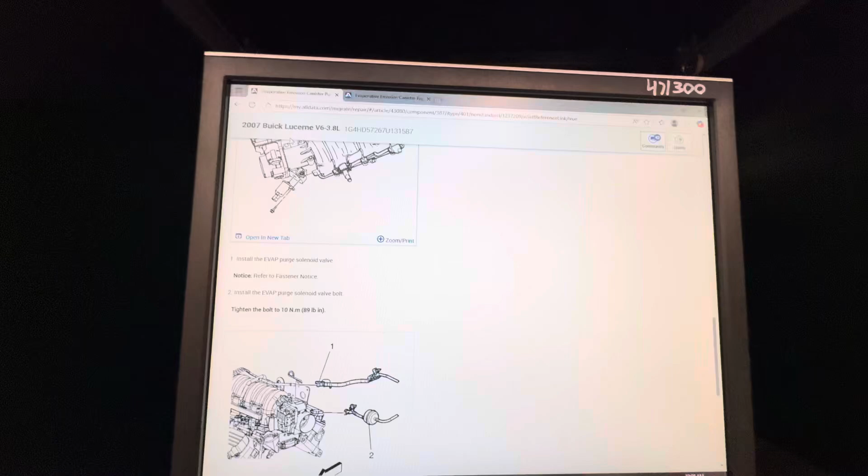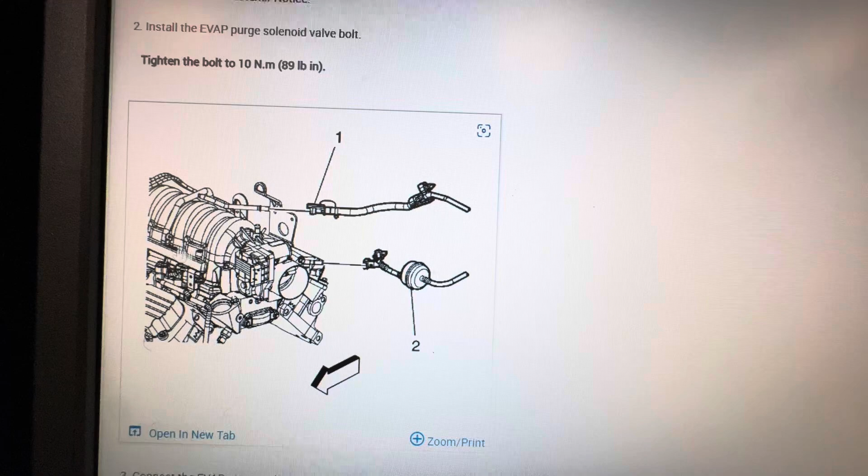This week for our Evap lab, we're going to be taking a look at a 2007 Buick Lucerne. And here on All Data, it is showing our purge solenoid up by the intake manifold and how that is going to be going to the canister under the car. So you can see with our hoses coming in here.

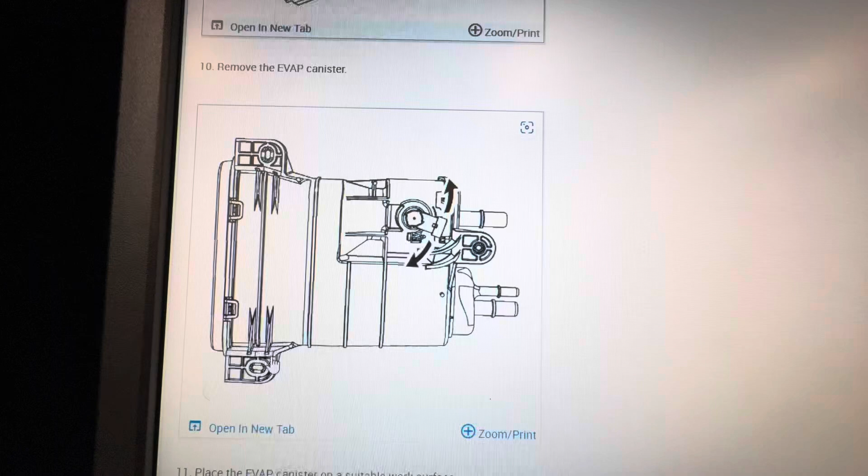This is a better view, but here's our pressure sensor and more connections in the back to our other solenoid and our gas tank. Here is that other solenoid I was talking about, and unlike some other cars with it being remotely mounted, this one is mounted on top of the canister and is very close. After taking a look on All Data, I'm going to be showing you it here on the car.

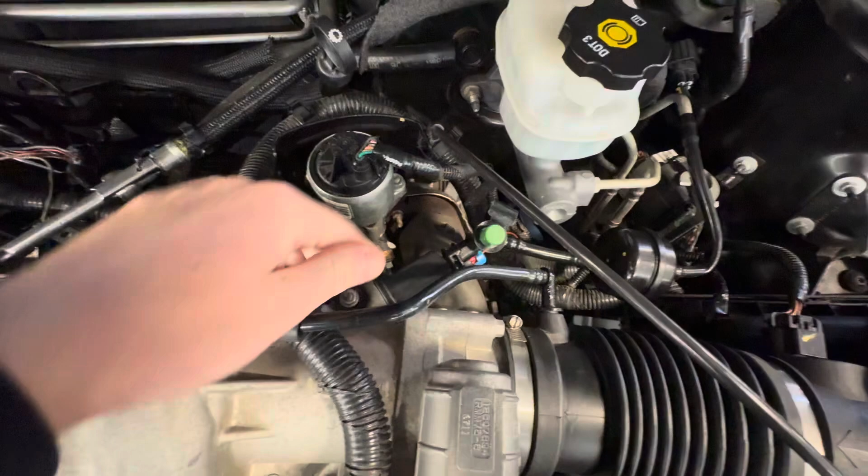So here's our purge solenoid. You can see those two wires down there, and here is our service port used to smoke test the Evap system. And then now we're going to take and follow this line all the way down to the underside of the car and show you everything else.

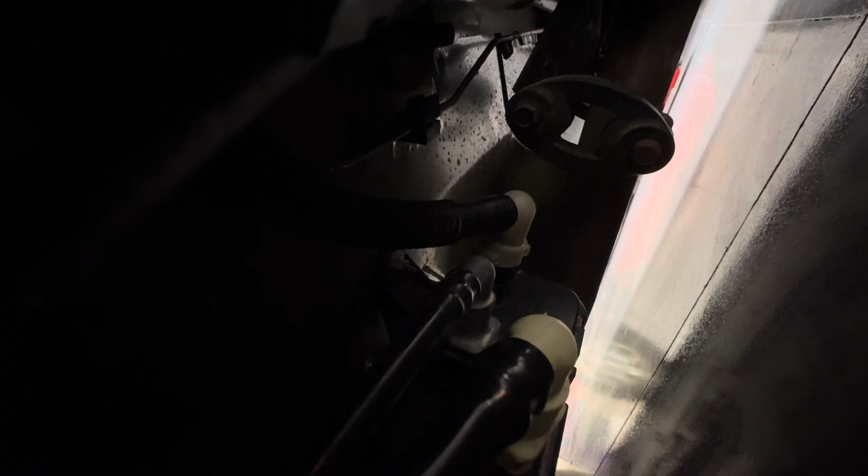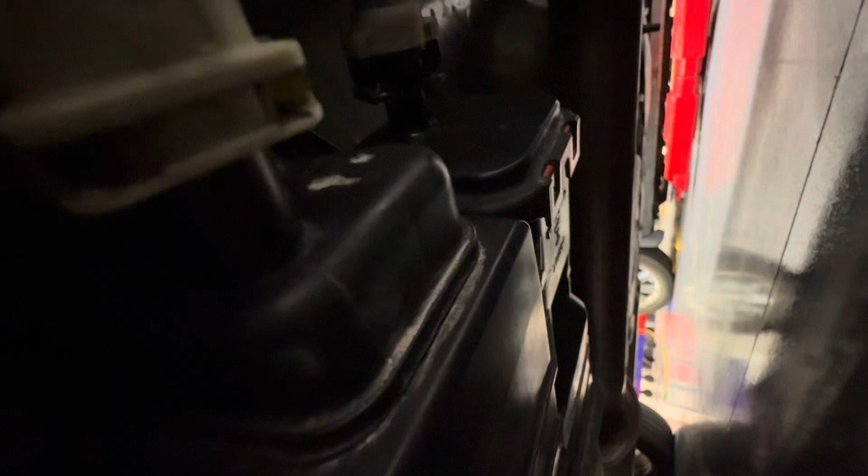So now that we are under the car here, you can see these three hoses coming in. That middle one is actually connected to that purge solenoid that we just came from at the front of the car. This far one is connected to our gas tank and to our charcoal canister here through that filter.

And then this one over here is to our fresh air, technically, and that second solenoid we have in the system, which is above the canister here. I don't think you can see that, but it is up there.

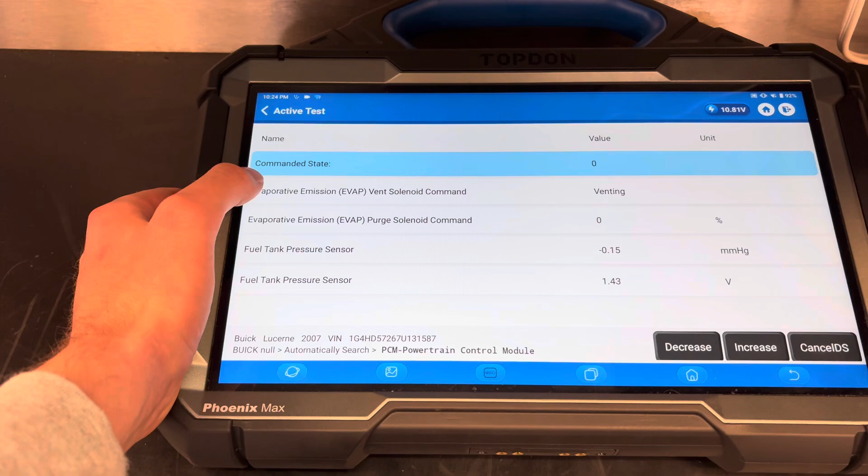Now in this Topdon scan tool, we're going to be looking at our live PID readings for our Evap system. Our evaporative emission vent solenoid is right now venting. It's open, and it will stay open until we have to run an actual Evap test and see how much pressure our system can hold, or vacuum our system can hold.

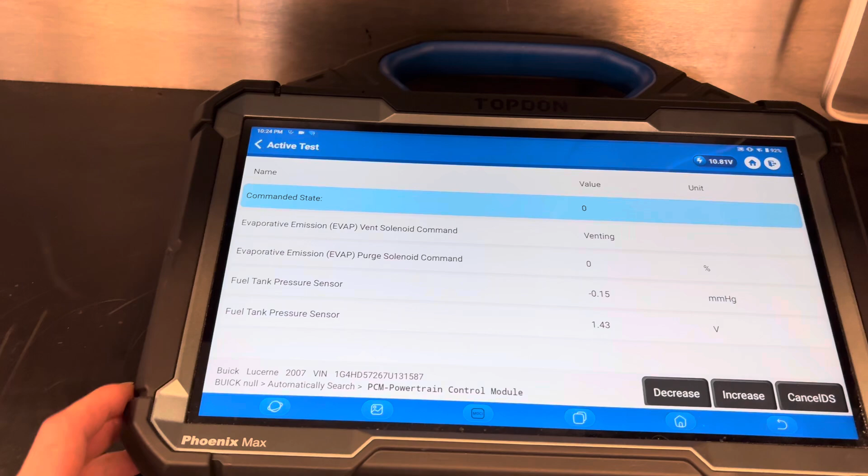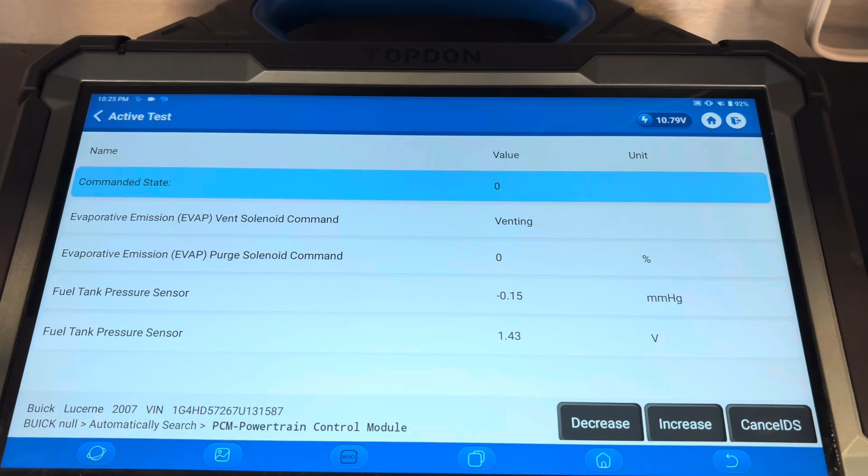Our purge solenoid command is at 0% right now. We can increase and decrease that as we go on. And our fuel tank pressure sensor is reading negative 0.15 mm of mercury. And that's equating to about 1.43 volts on the sensor reading.

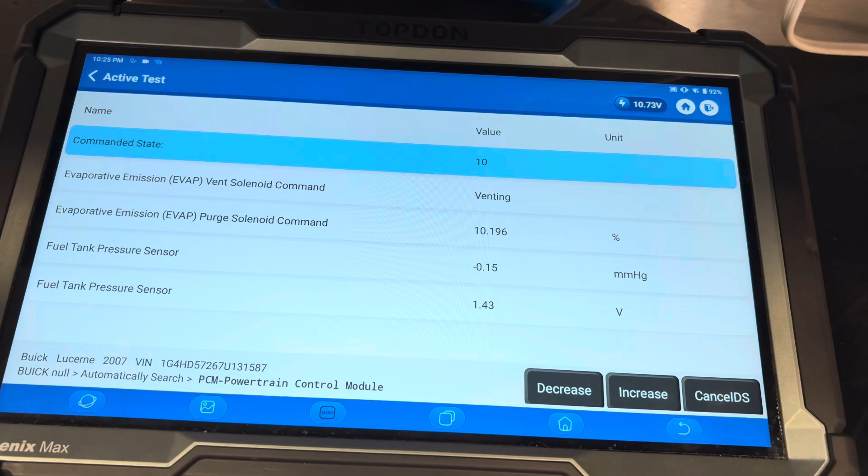If I increase this reading right here, I press increase, we can command it to 10%. And if we walk over to the vehicle, we can hear it actively pulse width modulating that solenoid, so we have 10% duty cycle.

So with our vehicle sitting here at idle, our 2007 Buick Lucerne, we're actually getting a good amount of usage from the Evap purge solenoid, and we're commanding it from about 14 to 20%.

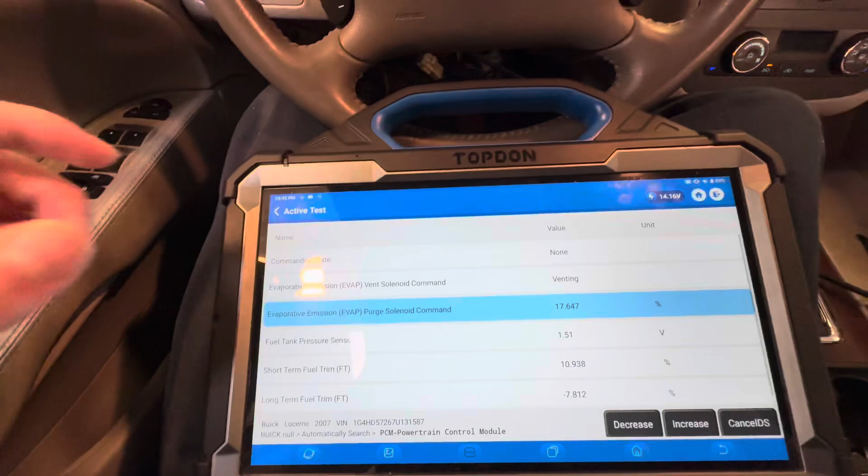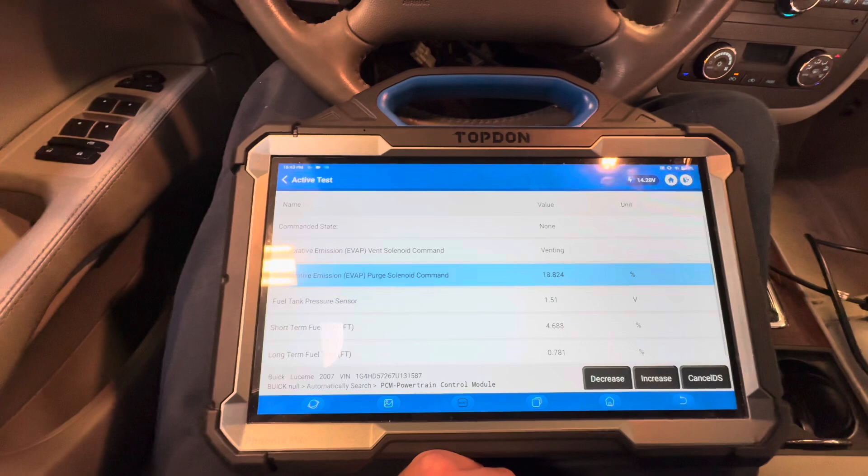And we were gonna look at our short-term and long-term fuel trims, how they changed as we increased the purge solenoid command. But here at idle, sitting in this vehicle, it is being commanded already. So we can look at our trims and we can impact them from that point. But I wanted to point out that we are getting a purge solenoid command at idle.

So let's decrease that reading. Let's make it 0. The vehicle, you can hear it running a little awkward now. And we're taking some fuel from our short-term fuel. We're cycling. Our long-term fuel trim seems to stay the same.

Let's increase that percentage again. Let's get 20%. Immediately our long-term fuel trim just shifted over. Our short-term fuel trim is still trying to figure out what it wants to do. It's at 4.688. So it's cycling, it's switching. But the second we increase that command percentage of our purge solenoid, our long-term fuel trim accounts for that and goes down.

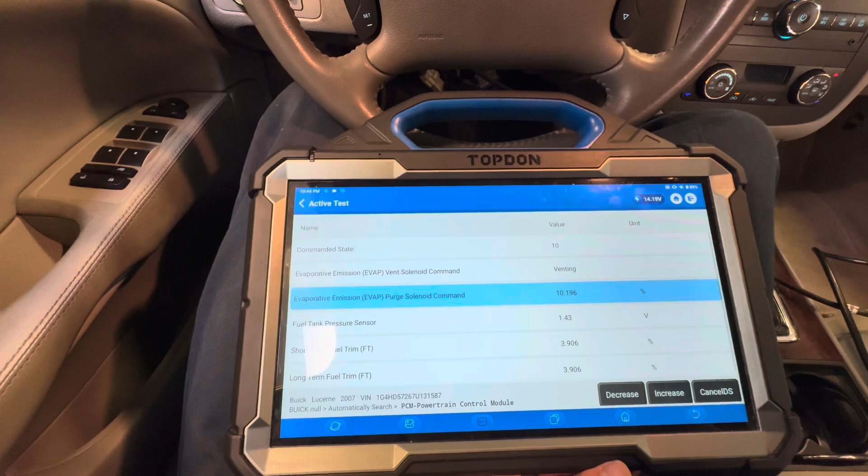So if I decrease it to 10, you see our short-term fuel trims are doing a lot more now. We're taking away a lot of fuel. Still taking away fuel. Now we're back to where, still taking a lot of fuel.

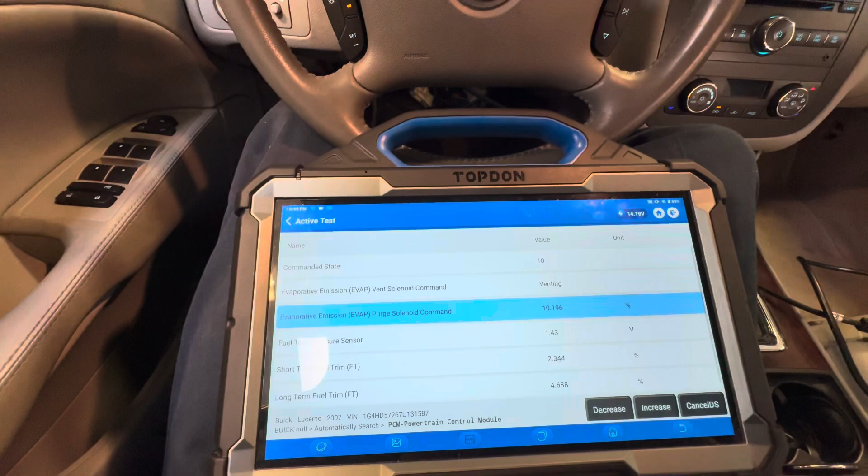Take it all the way down. Our long terms just switch back super high, or much higher than they were, and our short term starts to do less. So, food for thought. Just wanted to show what the vehicle is doing and how impacting the purge solenoid command altered our fuel trims.

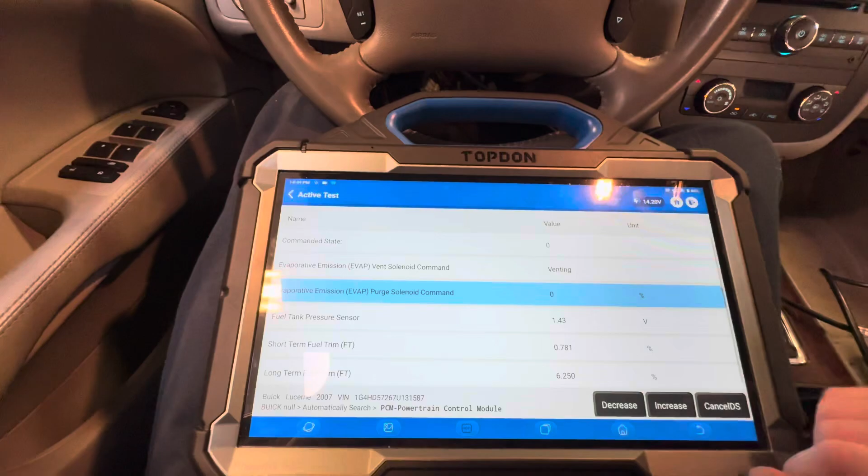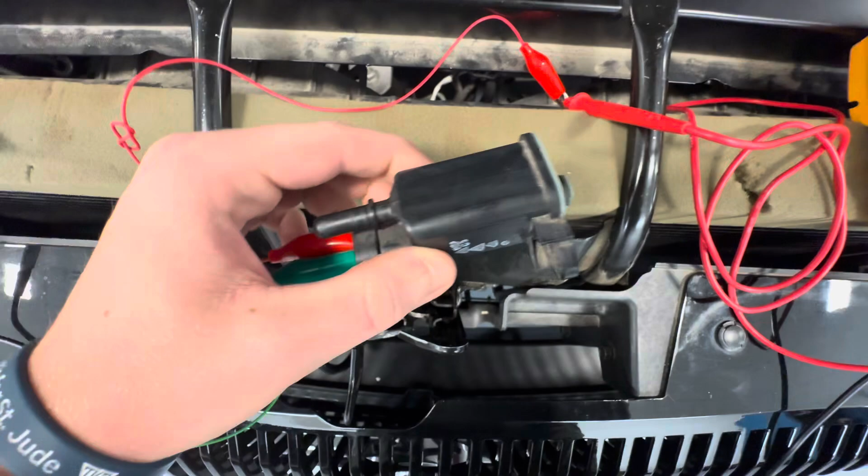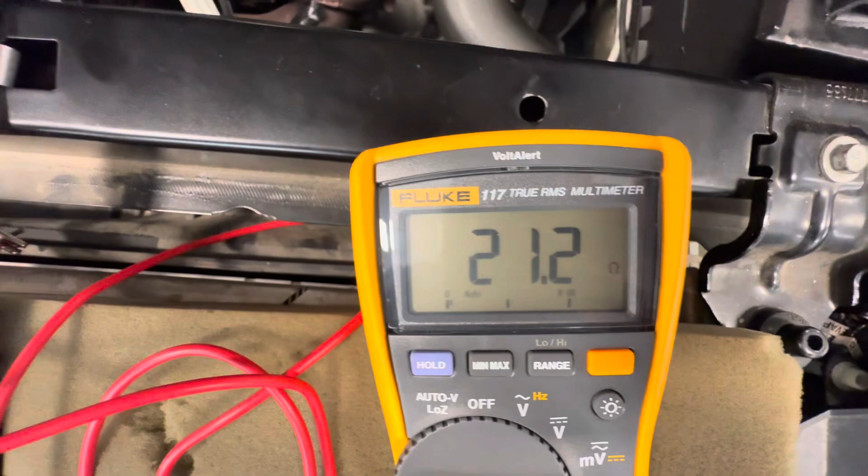So here we have removed the purge solenoid from the intake manifold here, as you can see, off the hose connector and right there with one bolt. And we are now looking at it here, and we got it hooked up for an ohm test. Everything looks good on it. O-ring looks good, and as you can see, 21.2-ish ohms there. Solenoid is looking great.